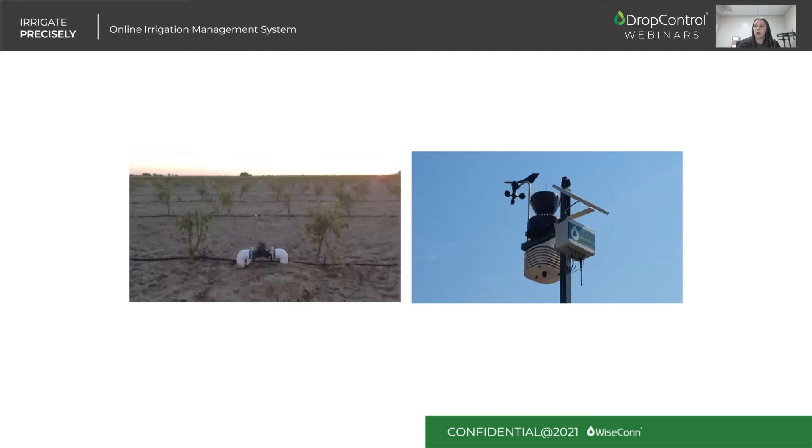We do a lot of soil moisture monitoring. We are sensor agnostic, meaning we can use an open protocol sensor in the field that we can retrieve data from to read on our platform as well. So it does not need to be a soil moisture sensor that we sell or install. If you have a sensor that has an open protocol, we can read into it.

And of course, we offer full remote capabilities, meaning from your phone, desktop, iPad, etc. You can turn on and off your pump, schedule irrigations, monitor soil moisture, look at weather reports or forecasts, all from your device, in the office, in the field, at home, wherever you are.

DropControl actually uses 900 megahertz frequency that all the nodes talk to each other on. This information then goes to the cloud. So essentially the M1 node could either be a cellular gateway in itself or a radio module to then read for the gateway, either the X1 or the C1. And going into the C1, our most sophisticated and in-depth node, this is our pump filter station control node. The C1 can actually start and stop 5 different pumps and 10 different valves, as well as fertilizer pump and acid injections.

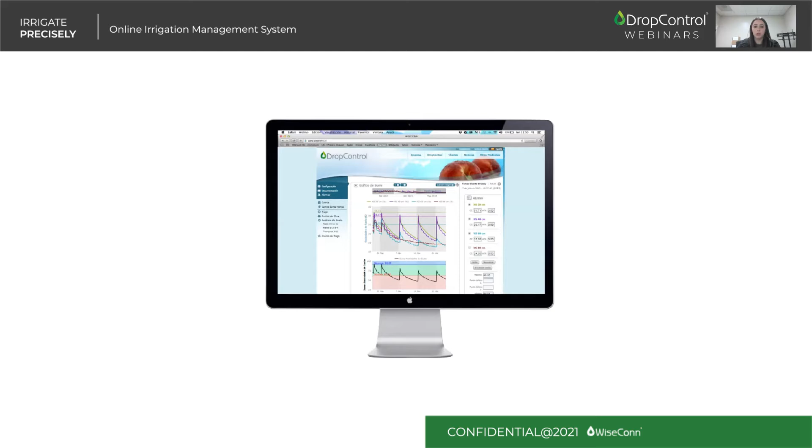And as mentioned before, we can also share data with other companies through our API. We offer a desktop version. This is a quick snapshot of the web page, as well as a mobile app available on Apple or Android.

Here is something similar that you would see if you were viewing your account through DropControl on the desktop. A map is created using a KMZ file on Google Earth with the exact coordinates of your ranch. We then place the location of each node onto this virtual map with all of the information and sensors configured to each individual node.

So any soil moisture sensor, weather sensor, pressure switch, anything you have tied to a node, you're going to be able to see what is configured to each node in the field on this platform. You can also see charging status and signal, all within the same platform.

And we focus on easy to schedule, user-friendly platforms. So you have your four modes of scheduling: by zone, one by one, immediate—if you're out in the field and need to start an irrigation right away, you can use immediate irrigation—group irrigation, so multiple zones at one time, and then of course programs and templates, which I'll go into here in a bit.

A couple actions you will see right when you enter DropControl into your scheduling tab are start and stop. So if you need to stop an irrigation anytime, it'll stop right away, and then you can always start right back where you left off.

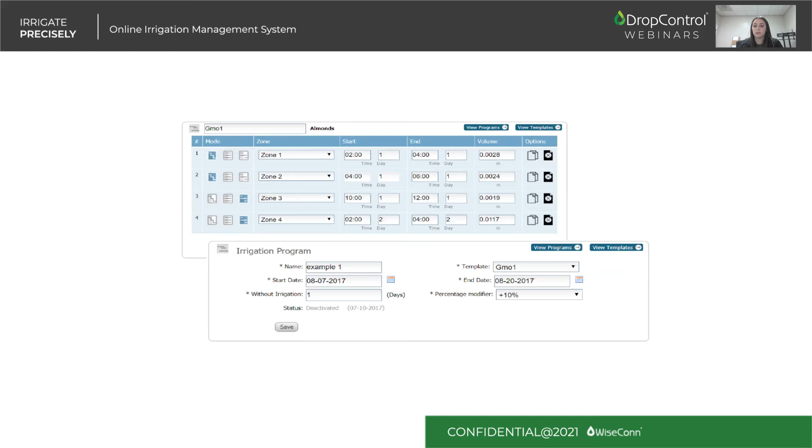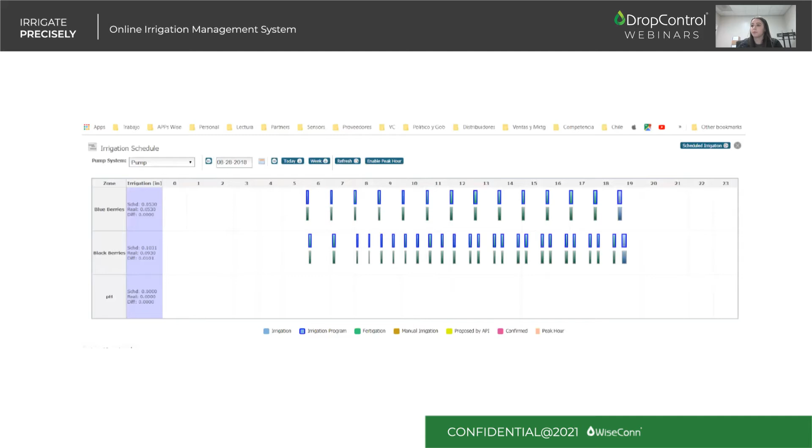You can also view them in a weekly view, so see what's happening Monday through Sunday. And you can always export this to print out and send to anyone on your operation, so everyone's in the loop at all times.

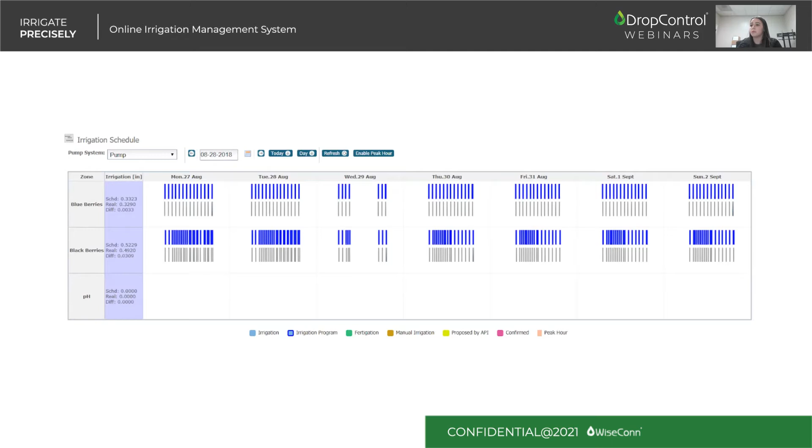We also have the ability to view operational feedback based on your sensors, volume and flow, duration. This is all calculated to show you what actually happened. So you just run your cursor over the executed irrigation tab, and you'll be able to see all this information that happened during an irrigation event.

Manual operation, you can also see in our scheduler anytime. When you execute a manual operation by hand, it's going to show up in gold color, and it will also show you the volume that is put out and the duration of time of the manual. So it's not just the autonomous irrigation that you would be able to see.

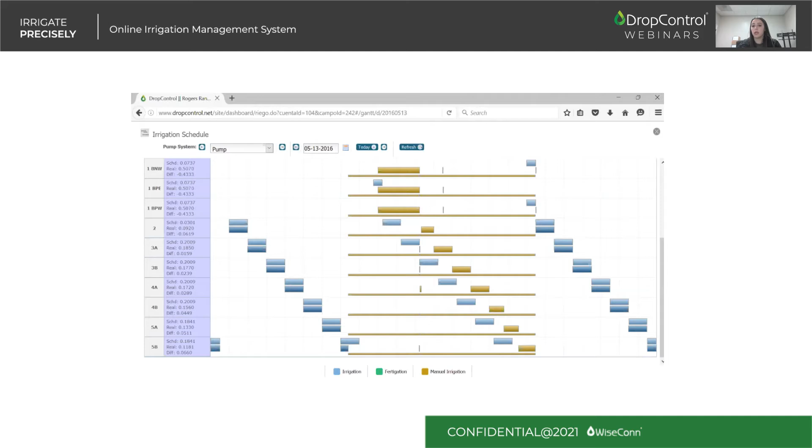Peak hour mode would be very helpful this time of year, if not all year. This is a helpful feature because it not only presents on your daily view what hours that peak hour mode is set for, which you can also edit at any time if peak hours change, but it will also alert you when you schedule an irrigation and you're going to go into peak hour.

So if you're just 1 minute over 4 p.m. or 5 p.m., DropControl will alert you before your irrigation is scheduled: 'Hey, you're entering a peak hour. Do you want to continue?' And you'll have the availability to continue your execution or go back and edit it so you're not entering peak.

And this is also bi-directional, so we can display our data or schedules onto another company's platform, as well as we can see theirs on DropControl. This is really where closing the loop comes into play. This is what sets our two companies apart, using that API irrigation directly.

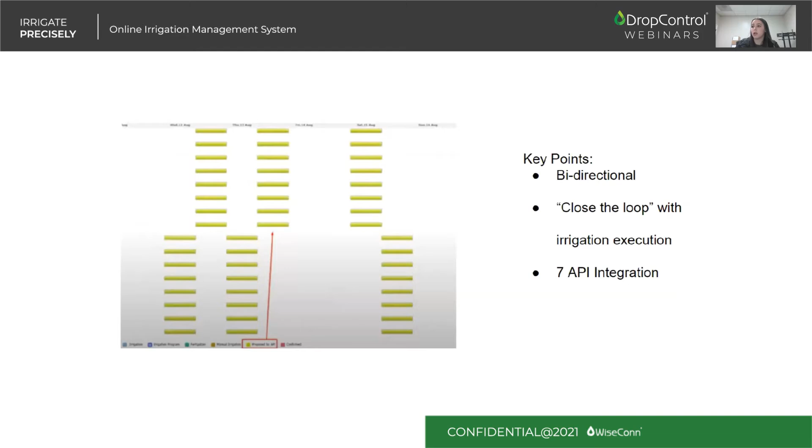We're actually closing the gap during closed loop irrigation, making it not much of a hassle on a grower to use two different platforms. We're able to put it all on one. WiseConn has 7 API integrations, so we're very experienced with the process of working with a third-party company like AgMonitor and implementing their recommendations or proposals.

And when a recommendation is confirmed by the grower, this is what they would see. Before it was just a recommendation or proposal, and now this is confirmed by the grower and ready to execute. We offer a mass approval button, allowing you to approve multiple irrigations at once instead of one by one. And then, of course, single approval, so if you only want to approve 1 or 2 at a time, you're able to do that as well.

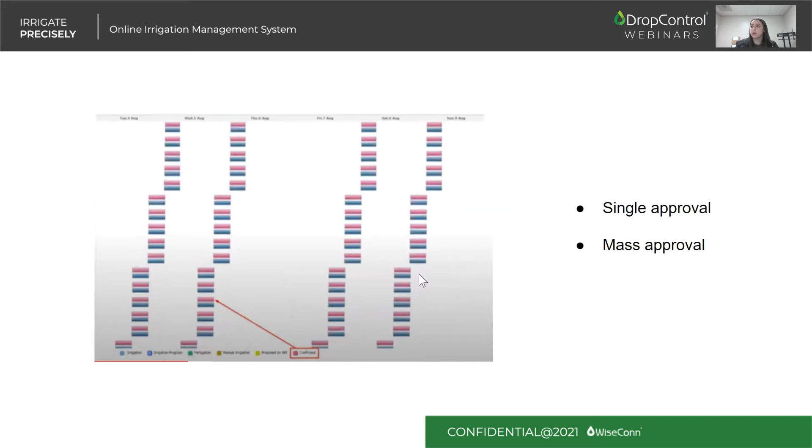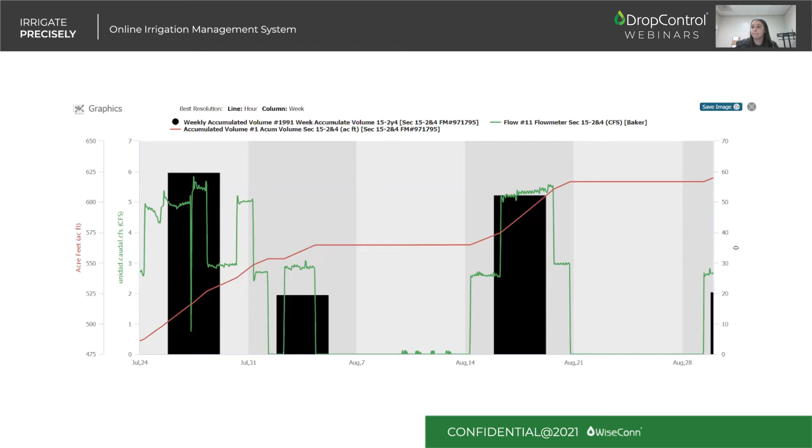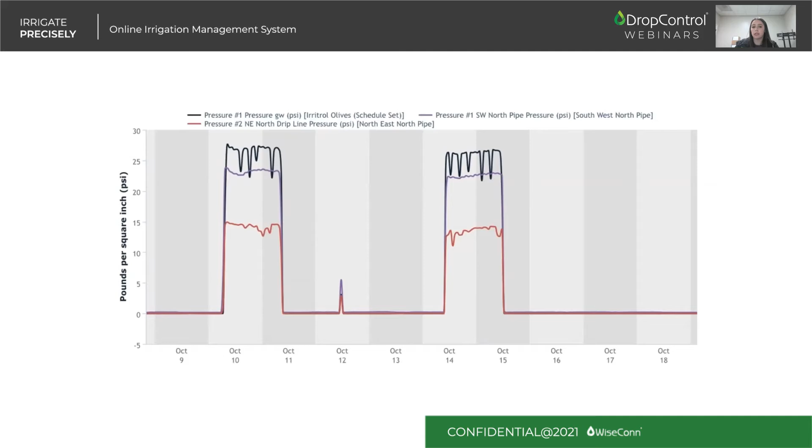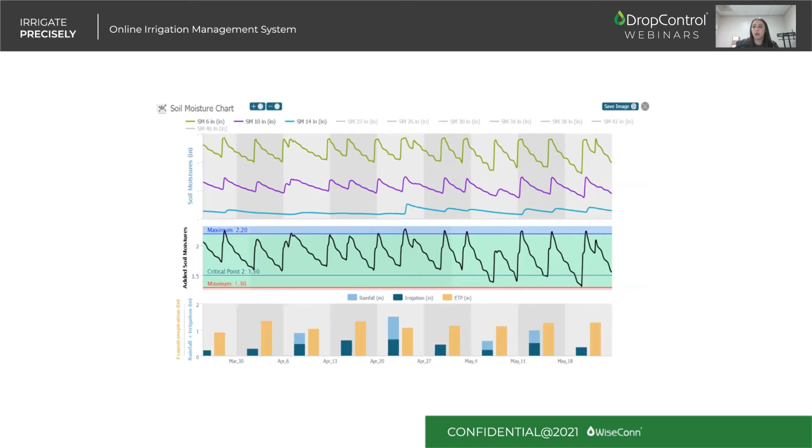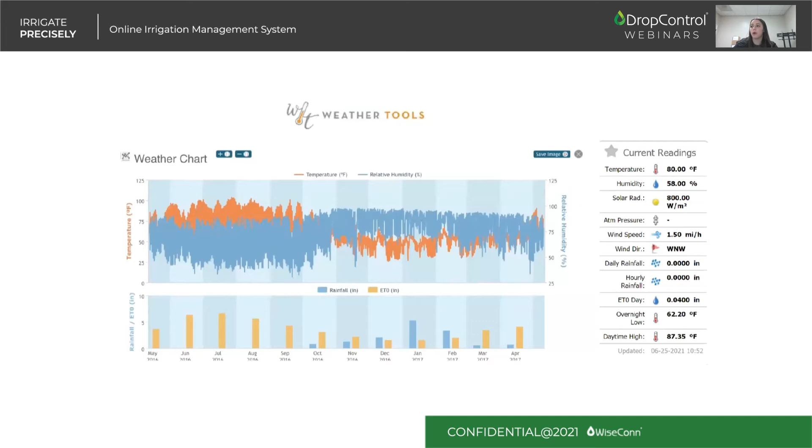Our weather analysis tab allows you to view temperature and humidity, as well as rainfall and ET. Our weather analysis now includes an in-depth 5-day forecast, as well as current readings of wind speed, direction, hourly and daily rainfall, temperature, lows and highs—all that good stuff is implemented into your weather forecast based on a weather station, or like I said, CIMIS.

Frost protection is another tool that we offer. You can set a minimum temperature to alert you when you're entering a frost event. The highest temperature at which you'll be able to see frost is around 35 degrees, so you can set that as your minimum. You can also set an alert to notify you when the temperature is surpassing the critical limits you personally set, and set up an action with support to automatically start an irrigation event or any other action when you enter specific temperature ranges.

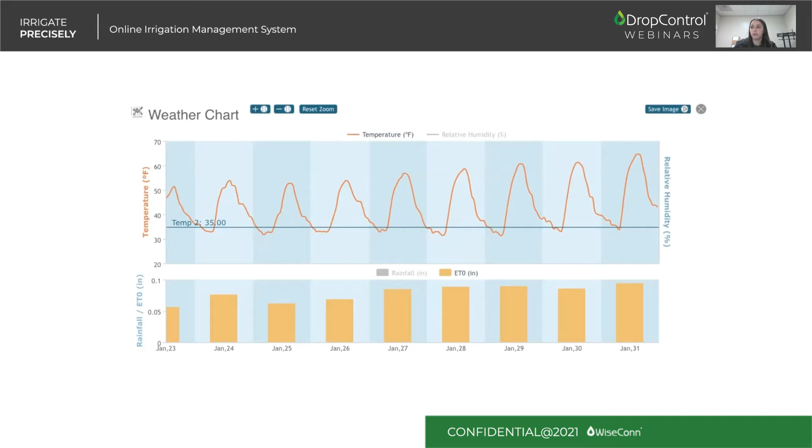You also have the ability to set chill hours. This is showing us accumulated chill hours from November to May.

Alarms and alerts are a very useful tool, like I just mentioned. Alerts can be set up by the grower on their DropControl account very easily. When your temperatures are surpassing the threshold, or when your soil moisture is not where you want it, you can receive an alert, whether that's SMS, text, email, or robocall. And then alarms can be set up for you, through the support team, for an actual execution or action to happen.

ROI, something we focus on a lot here at WiseConn - yield increase in this case was very significant. This testimonial featuring Tom Rogers is on our YouTube channel, one of our many success stories, one of our largest ones. Tom actually lost a well at the beginning of summer and still saw a 5 to 10% increase in yield and 30% water savings just while using DropControl. This was very significant for Tom, not only while losing a well, but still saving water in the meantime. So this was pretty huge.

Getting more into the process of our closed loop irrigation with companies like AgMonitor - this graphic can give you a better understanding of the interaction between us, as well as dealers and distributors. You have your client or grower working with WiseConn for support or service, the dealer or distributor for installation, and lastly the integrator. In this case, AgMonitor works directly with the grower as well as with us. As mentioned before, our companies are closing the gap between integrations, making the most seamless possible process for our growers.

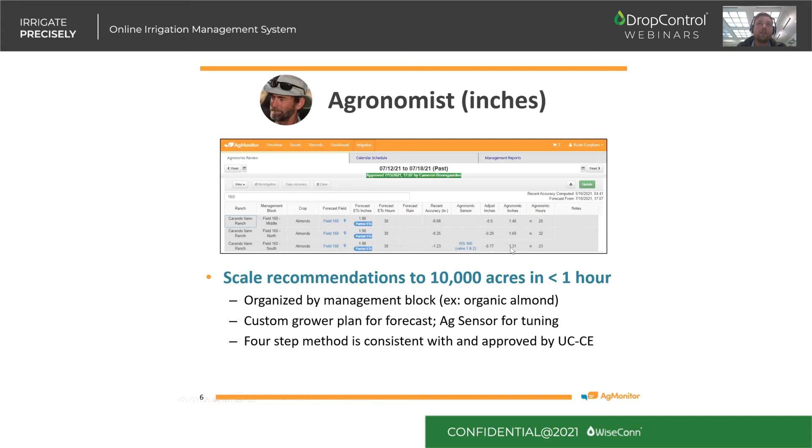Our platform allows them to scale their recommendations across several fields or even 10,000 acres in less than an hour. We have things like preset forecasts based on ET and crop coefficients that are customizable, data on what's happened recently, information from agronomic sensors, and then the ability to translate those inches into hours, which is important because...

...ranch managers, who are typically in charge of scheduling those irrigations, often think in hours and with labor constraints. They use the system to save themselves time and catch equipment issues earlier.

They have a simple schedule they can work with to implement the suggestion from the agronomist, and they can print schedules for manual irrigation scenarios and foremen, or they can send them directly to automation systems like WiseConn's.

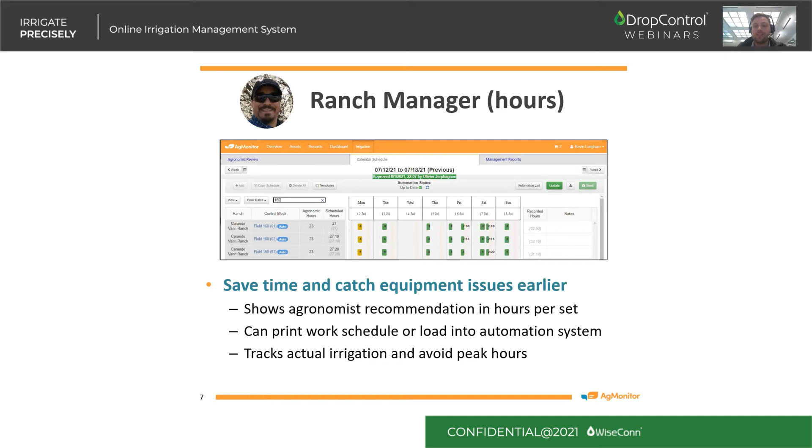And then finally, a director of farming, they don't really think in inches or hours, they think high level, they're looking at budgets. The system gives a high level overview of how the operation is progressing throughout the season.

When it comes to accuracy, how much water is being applied, is it the right amount, precision, are they implementing the actual plan that was set here accurately, and water budget. Where are you in terms of your total water application this year, and where are you projected to end?

Something that's really important in context of SGMA right now, which is limiting a lot of growers' access to water. So being able to track where you are and project is an important piece of the puzzle.

Okay, so that was just a high level introduction overview. I'm going to start getting into some of the details and show you guys some examples.

And this first section is the agronomic loop. What this is going to do is we're going to look at the agronomic view of things and show you how to implement the best irrigation plan or the optimal irrigation plan and get your best crop by leveraging the system.

Okay, so the example I want to show here is from a large almond grower in Winters, where we did a little study with them. They have several thousand acres, but we worked with them on a 400-acre almond orchard that had some issues.

They actually had 3 different soil types in the field, and they weren't able to irrigate to those soil types. They had to just do one fixed irrigation for the whole field, and it was causing issues.

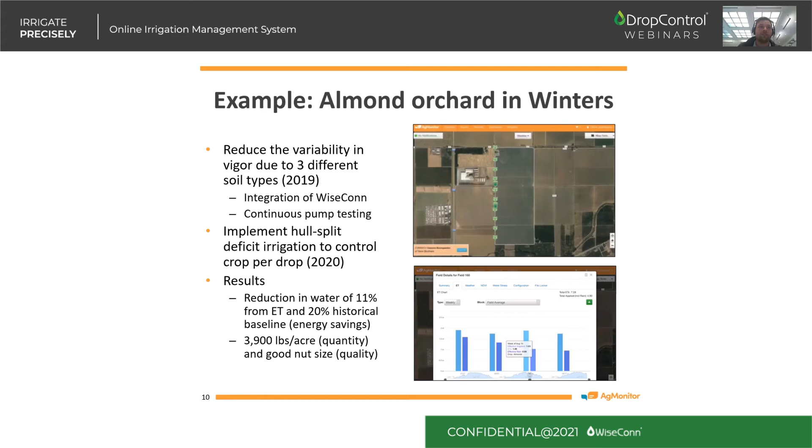Okay, so on the planning side, when you're looking at like an agronomist job, you're looking at how many inches get scheduled every week. And across a large range of sets, blocks, or fields, you need a system in place that makes it a little easier to schedule that.

So in our system, this is what we offer. We support both manual and automated fields. In some cases, agronomists are able to set their schedules, or recommendations I should say, on thousands of acres in less than an hour. We do this by showing forecasted ETC here based on actual ET data and the university recommended crop coefficients that are customizable. We always have customization in here in case you guys have some preference other than what the UCCE recommends.

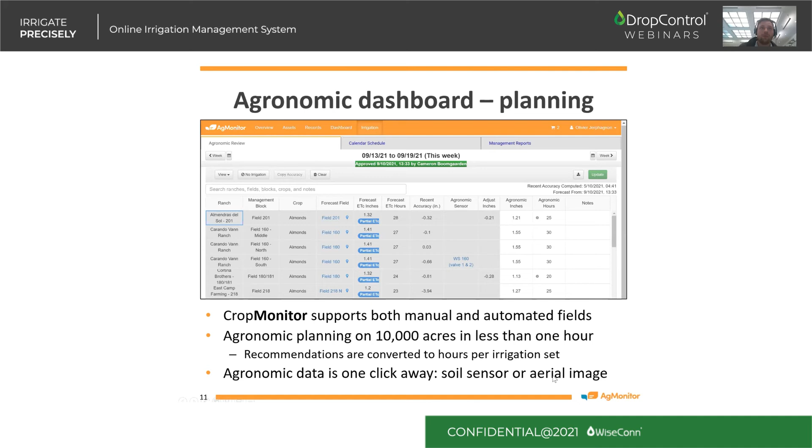Now, when you set your recommendations, that's great, but you want to know what happened. And we do this through something called a crop alert, where we're tracking the water in the root zone at any given time compared to the water that the crop needs. We will generate an alert if we see an imbalance. In this case, on our management page, looks like a bunch of green fields that are doing well, and then we have one red alert. If you click on this, you can see a little detail of the water budget for the year.

You know, there's several lines here, but what we're tracking on a per block or per field basis is your actual application, the darker blue line, compared to your plan in the black line, and then a full ET or partial ET schedule.

So in this case, you can see this blue line kind of flattened out. This was during harvest, and they actually had some pump issues and weren't able to irrigate for a while, and the system picked that up and generated an alert saying they were down on inches.

You can compare that to something like this top field here, where if you track the blue and the black lines, they're very close—less than a half inch off. They're staying perfectly on their plan.

Having the integration to track these and view your progress during the season, but also at the end when you have yield, looking at your performance and how well you followed the plan, gives a lot of feedback on how you did and allows you to improve incrementally throughout the season.

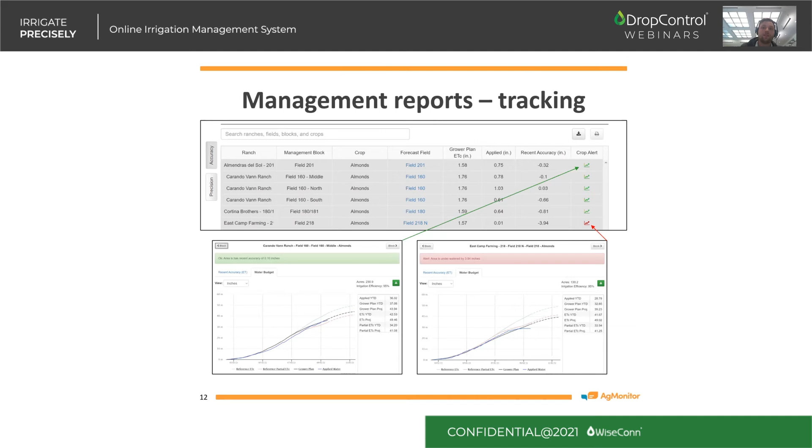So that is the agronomic side of things—planning and better management, which results in water savings. But in order to get cost savings, you need to make sure you save energy as well, and in irrigation that means managing your pumps better. We have a product called PumpMonitor, made to do just that—to better manage your pumps.

We measure your energy use from your smart meters at the utility. We track water use and your efficiency, which we can estimate from your smart meter. What we're able to do is detect potential issues and give you feedback on pump efficiency.

In the example here, this is actually from that same grower near Winters. They installed a VFD in 2019, and there was a little miscommunication between the dealer and the installer—it wasn't quite installed right, and it was operating overclocked, so it was damaging the motor.

What you see in this red circle here is a graph of that pump's energy use in orange, and the black line is the pump's efficiency every time that pump is turned on. Now you see it's really low here because that pump is being overclocked.

Through our system, they were able to see that, talk to their dealer, and fix the problem. Then for the rest of the season, they were operating very consistently around 65 to 70% OPE, which is fantastic for a pump like that.

And we're looking at the whole irrigation system. If you really want to get cost savings, which most people want, and a good yield, you have to make sure your pumps are still operating efficiently and giving you the water output that you need.

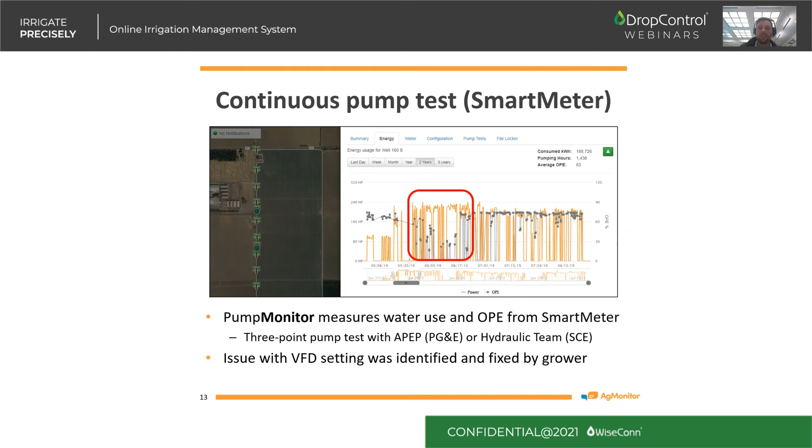So for this grower, what happened? Well, they were able to get pretty good savings. They had an annual energy bill reduction of about $17,000 due to being able to manage better application of where and when that water was needed.

And given what they invested—because of course they needed some hardware in place from WiseConn and required our software—because of these savings, they were able to pay that back in about 2.8 years, which is pretty good.

If they wanted to be aggressive and try to cut water by 25%, you could pay back a project like this in about 2 years with a $20,000 savings a year.

Now, maybe you're already irrigating kind of efficiently and don't want to be that aggressive—you want to start small. Even a 10% savings, you're still getting about a 5.5-year payback.

And in reality, every year is not going to be the same. It's important to look at that variation and take it into account when looking at projects like this.

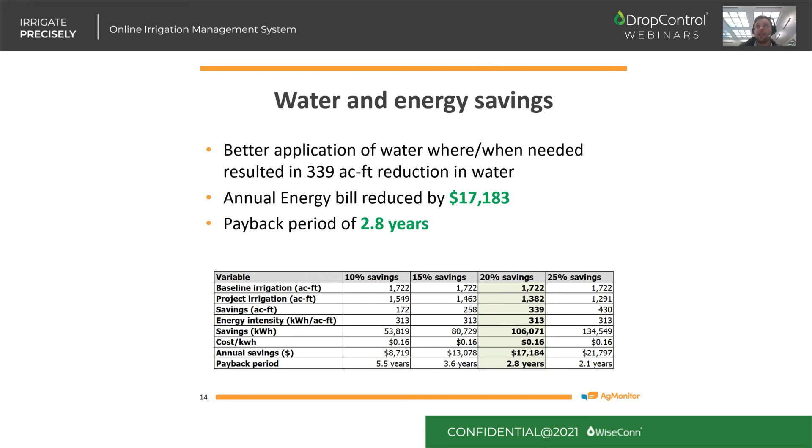Now, if you are getting savings like this and you're tracking the data through a system like ours, it enables certain types of financing options.

An example of that is on-bill financing, offered through the utility by the CPUC. The main premise is that you can get a loan with 0% interest, 0% down, of up to $250,000 per project if you're getting consistent energy savings. EE stands for energy efficiency.

Now, the only catch here is that you have to pay that back over a 10-year term. So if your project costs $100,000, you need to save at least $10,000 a year to pay that back over the course of the project.

Now, this does require a fair amount of paperwork, analysis, and gathering data, and companies like AgMonitor are perfect to help with that. We have an existing partnership with PG&E and the relationships to help you with the paperwork and get in contact with the people you need to get a project through. We're helping you generate the savings by tracking and planning deficit irrigation schedules and getting constant feedback.

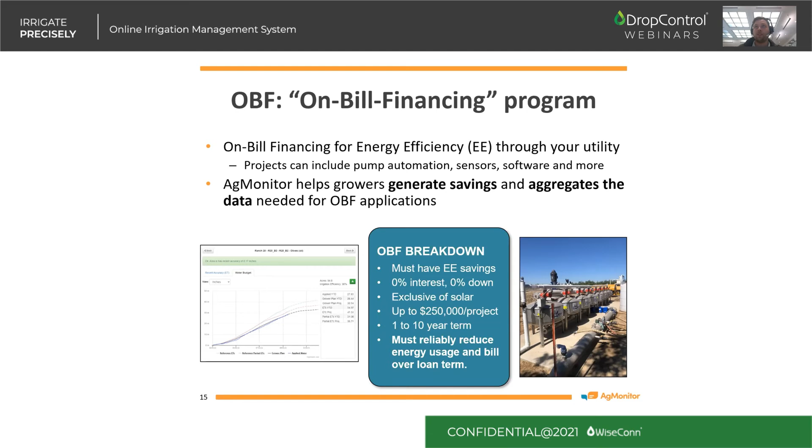So when applying for something like this, leveraging a company like ours is going to make it a lot easier for you to get that money and scale across a large acreage, because doing this at a large scale does take capital investment. This is an example of a financing program to help with that.

Okay, so that was the agronomic section. We looked at that example of the grower near Winters. We're going to switch gears here a little bit and talk about something we call the operational loop, and that's looking at how accurately you implement your plan for irrigation in hours and reduce costs. It's challenging to implement new things, whether it's hardware, software, any sort of technology requires a change. We've developed our platform to try and make that easier and address some of the practical constraints growers see when implementing these.

So the example for this section, this is a large farm management firm near Bakersfield. We manage about 200 pumps and 7,000 acres for them. And in 2019, they leveraged our system in combination with WiseConn and talking to their utility to irrigate off-peak.

Now, when I say off-peak, what I'm talking about is the peak times for utilities. For PG&E, this is 5 to 8 p.m. For Edison, this is 4 to 9 or 5 to 8, depending on your rate. And these peak times are more expensive to operate. So the theory is, if you shift your pumping to avoid those times, you can save a fair amount of money.

Now, these guys did this through a combination of manual irrigation, implementing timers, and implementing automated irrigation through WiseConn. Because across their 7,000 acres, there wasn't one solution that fit every farm, and AgMonitor can fit seamlessly with any of these options. So like I said, they were trying to shift their load permanently.

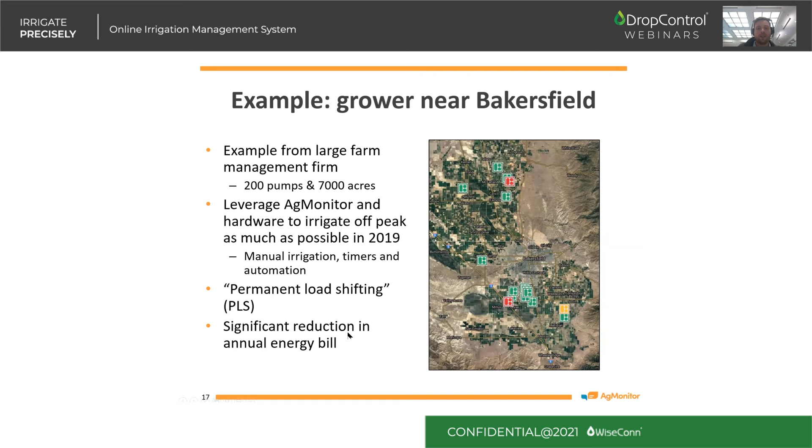This is actually a program that my company is putting on. I'll talk about that a little later. But with all these things in place - the software, the hardware, the recommendations - they were able to get a significant reduction in their annual energy bill. I'll go through some slides to show you how they accomplished that and what that looked like in terms of savings.

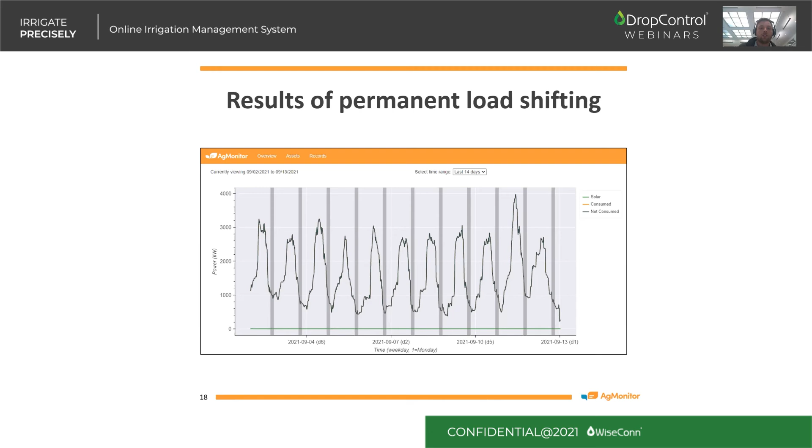So the question is, how did they get here where they're avoiding peak so effectively? Well, a couple different things they used to achieve this. One of the most important pieces to the puzzle they told us was that you need to track what you're doing every week. And in this case, because it's about timing and precision, you need to track what's happening with your pumps every week.

A couple of names have been changed to protect grower privacy.

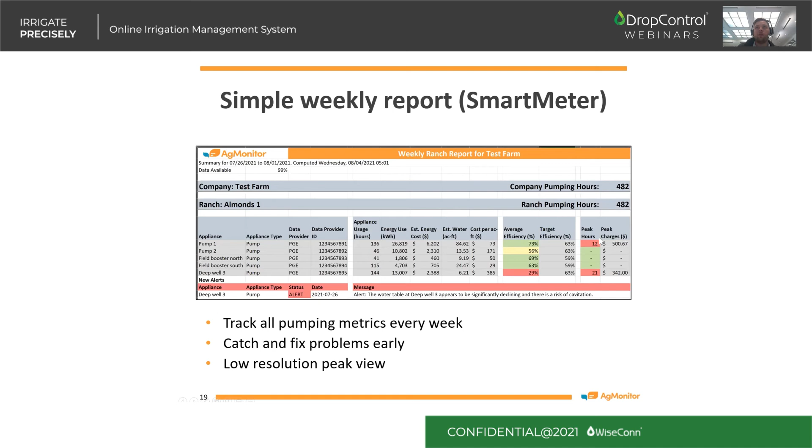You can figure out if you did operate on peak or not. But the next step is, well, okay, when did I operate on peak? For a higher resolution view, we offer that as well in something called a calendar schedule.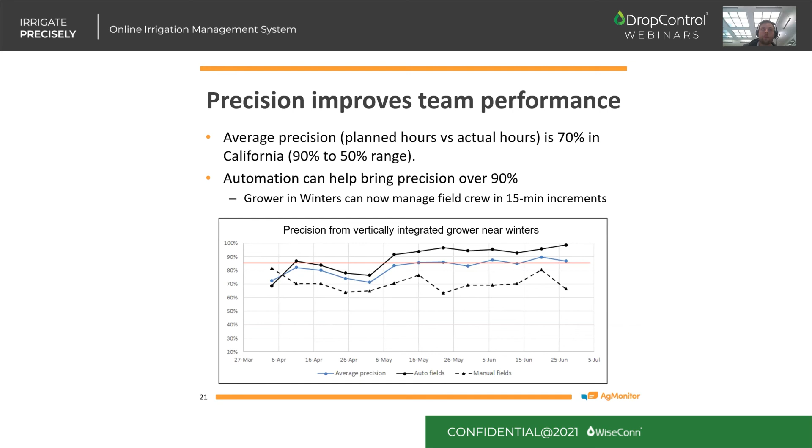So back to our example here, in 2019, that large grower tried to irrigate off peak and they were pretty successful at it. So the question is, how much did they save?

They also had a little bit of surface water in 2019, a little more than the last year, so that helped. But the result here was that we saw about $230,000 of savings from this implementation.

Now, of course, on a case-to-case basis, this is going to vary. You won't always see savings this high, but the system allows you to practically get those savings, and our dashboard allows growers to see the benefits for themselves as they're occurring and at the end of the year.

So going off this project, we saw this was a great result for the grower. Significant load was shifted, which benefited the grid, and significant savings were seen, which benefited the grower. And when we talked to other growers about this, they mentioned a lot of practical difficulties in doing this. Shifting irrigation to not operate your pumps at certain times is very difficult for certain operations.

So we got some funding, AgMonitor got funding from the California Energy Commission to help growers irrigate off peak and run a permanent load shifting program. Now, the idea behind the program is pretty straightforward. We provide software and partnership with different hardware companies to help growers avoid those peak times, 5 to 8 or 4 to 9. And the result was we had an average bill reduction of 15 to 30%.